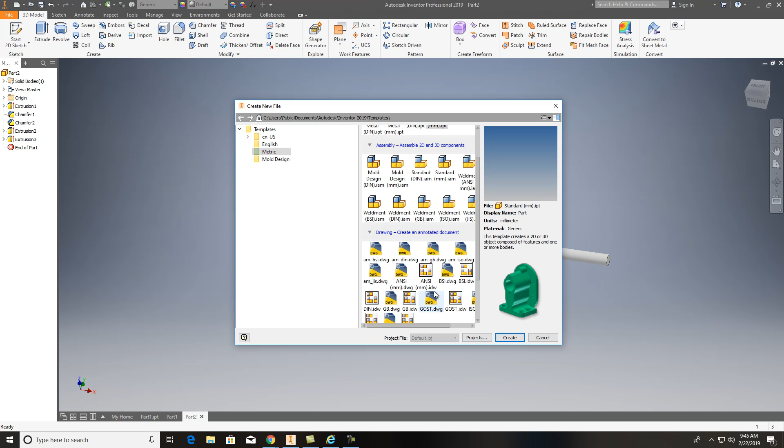Here's the drawing I've already got up in Inventor, and you can see this thing. It is really a long piece here, and if you put this on A-size paper and scale this in, it's going to look like this. Let me go in here and do a new print, and then I want to do metric IDW for this one. When I put this in here, if I put this on an A-size paper, it went to base,

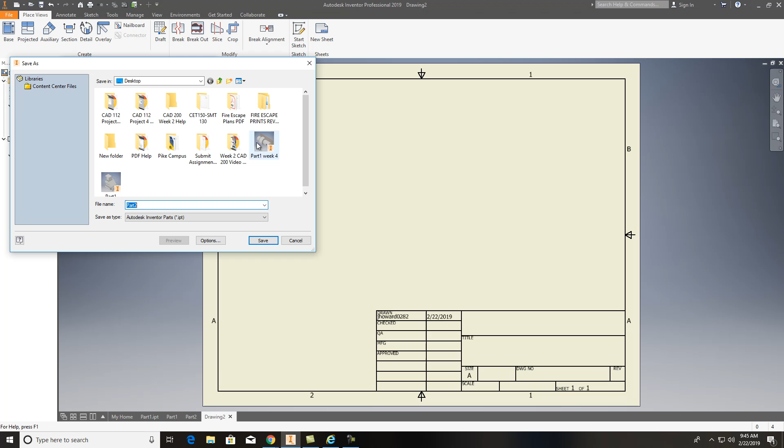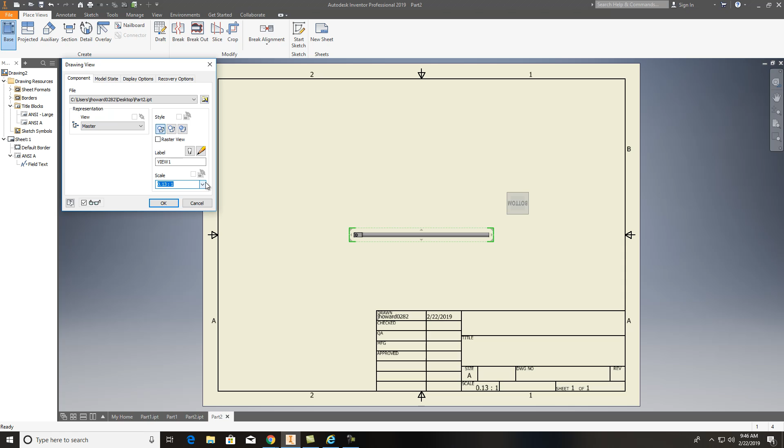and first thing I got to do is that part that I was drawing, I need to save it first. I need to save on it. And now I can go in here and open this up, base, and there's that drawing. And the thing of it is, if I put that in there, and let's say for instance, even scale it up just a little bit, if I go to 1/2 or even 1/4, you can see everything, but it's so small that you can't really dimension this accurately. It's hard to see that from that vantage point.

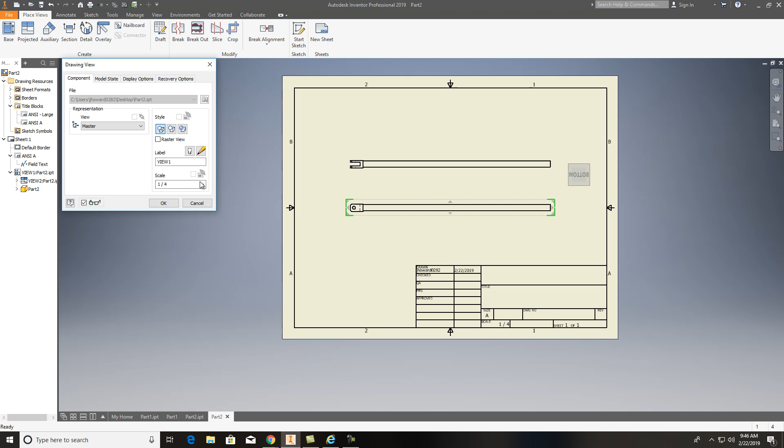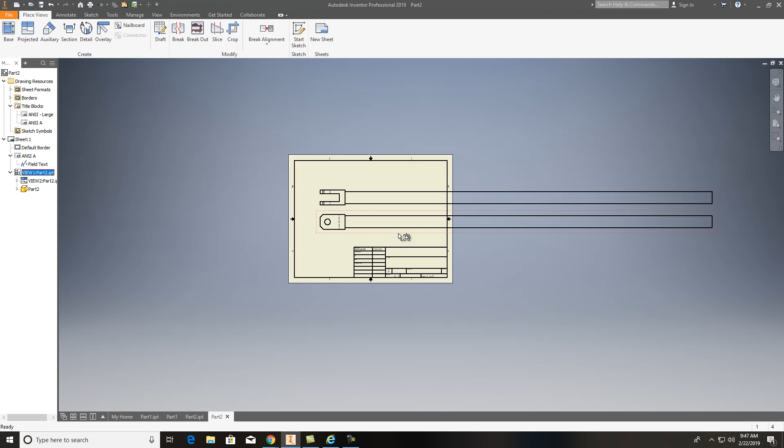So what you do is you edit the view here, and we're going to blow it up. Let's do like 1:1 and see what that looks like. That looks so much better. And all you have to do is just do a break. Okay, so I want to edit that view, change this to 1:1 scale, and then we're going to do a break on this, and I'll show you what I'm talking about. So I'll bring those in there, and I come back in to place views, and there is a break right here.

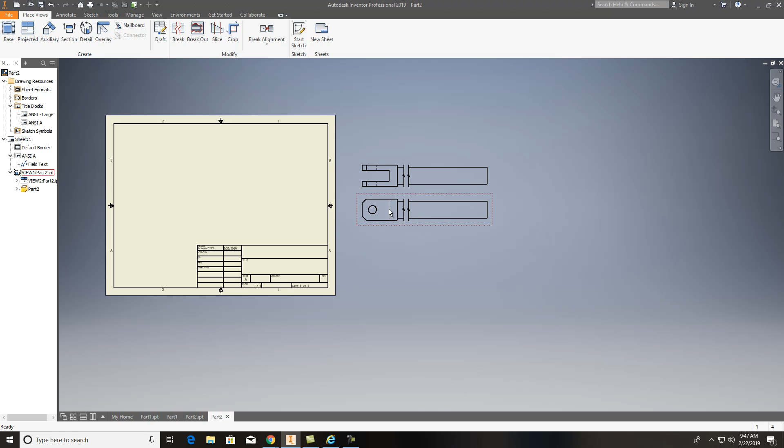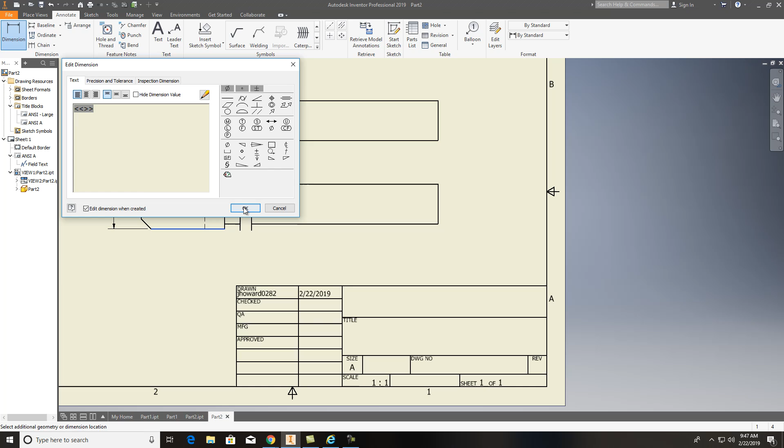So what I do is just click on my object, click all the way to about right in there, and you see what I'm saying? What it does is it breaks that. So now I can grab it and pull it back over here, and I shortened my part up, and when I put my dimension in, it will be accurate. That way I can see this much more clearly to put dimensions on, and also I can put my dimensions on this back through here, and it would be exactly what it would need to be.

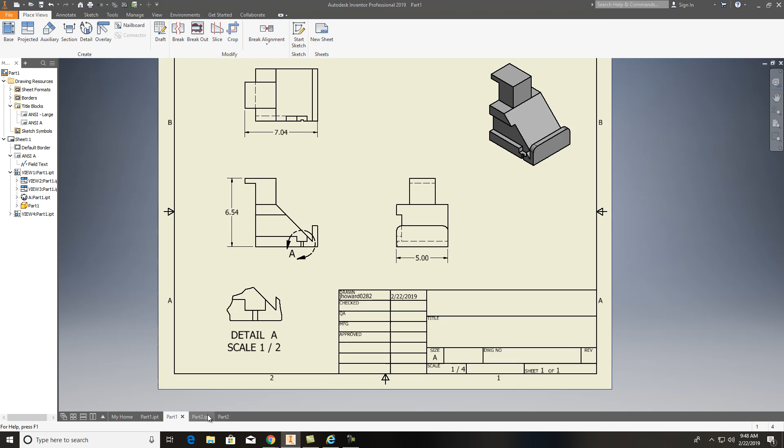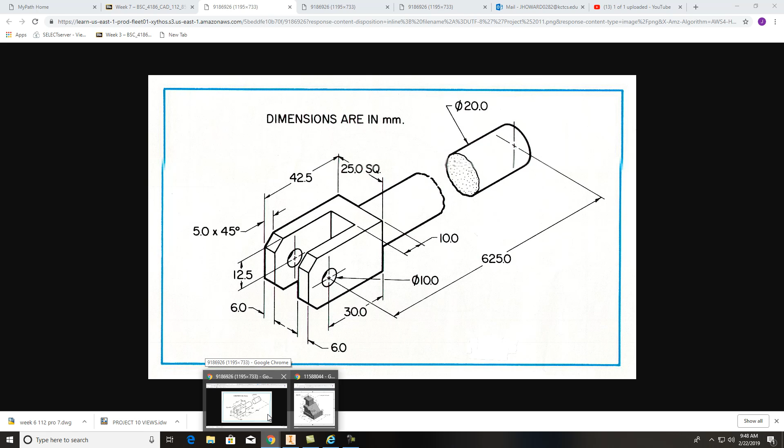625, and let's just check that out and make sure, because I think I might have done that wrong on the drawing. Let's go back and look. 625. Oh, it's from the center of this hole, 625. So we can fix that really quick and easy. The beauty about this is, this is 625. If I go back here to part 2, where I messed up on this, I can edit my feature. So 625 minus, and I need to look at that drawing again, 625 minus 30, okay? 625 minus 30,

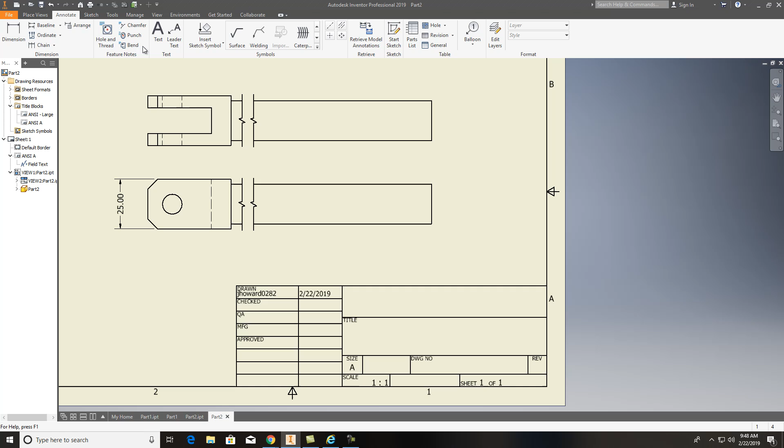then okay. It automatically adjusts, so I hit save, and when I go to part 2, it already updates this, and I can go here and actually I want to just delete off of it, dimension, and make sure to annotate, make sure you put your center marks in here. So click on that, dimension from there to there, 625.

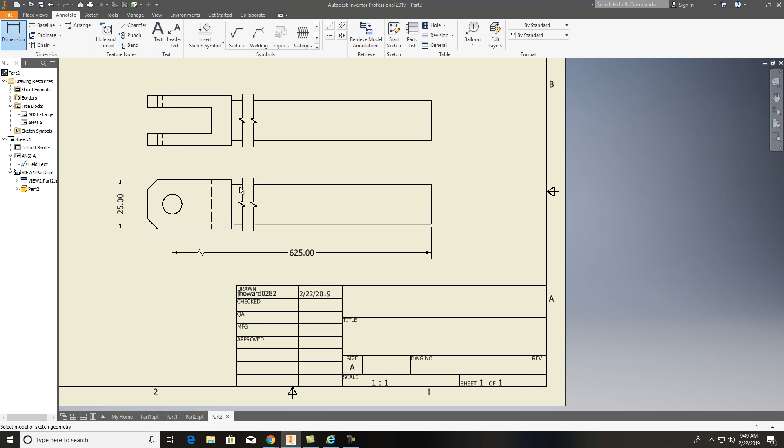And you see where it's got this little long break line right here is showing you that this is cut in the view here. It's broken in a conventional break so that you can actually get all that fitted on this paper. So you'll use those quite a bit, and it's really handy. If you need any help with this, just please contact me.